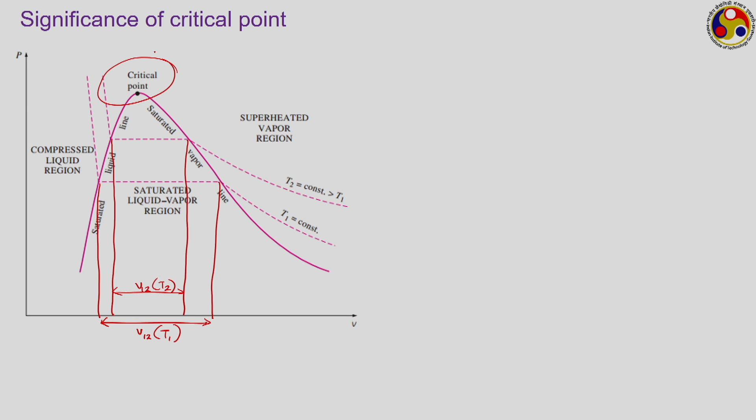So this is V1 to 2 for temperature T1, and this is V1 to 2 corresponding to temperature T2, which is definitely much smaller. As we keep moving to higher pressure or higher temperature, this value keeps reducing continuously until we reach the critical point, where the saturated liquid state and saturated vapor state merge with each other, and there is no distinction between liquid and vapor at this juncture.

So, the critical point is a property for any fluid, and therefore any substance has a fixed value of pressure and temperature at the critical point. But apart from being the point which removes the distinction between liquid and vapor phase, there is some further importance or significance of the critical point as well.

Now, let us follow any particular temperature line. Let us follow the temperature line shown as T1. So, let us start with a superheated vapor state, say somewhere here. We are starting from this state point, and at constant temperature we are increasing the pressure of the system.

So, what will happen? As the pressure increases, we shall be moving along this line, that is the volume keeps on decreasing, and after continuous increase in pressure, at some point we shall be reaching the saturation pressure, which is this much. So this is your P sat corresponding to this temperature T1. At this particular point, any further effort to increase the pressure will not cause any change in pressure.

Rather that will cause a change in phase, that is the superheated vapor now starts to condense and gets converted to the liquid phase, and with continuous effort to increase the pressure we will keep on condensing the vapor till it reaches the corresponding saturated liquid state, and from that point onwards again the pressure can keep on increasing. So, that we all know now.

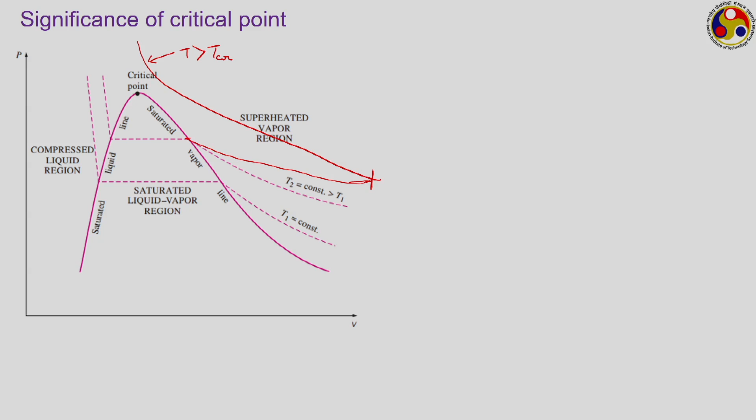So when dealing with a temperature higher than the critical temperature, the vapor phase becomes non-condensable during any constant temperature process. Of course, we could cause a change in temperature, moving through several different temperature levels, and may reach a saturation point, but that's not the focus here. Here we are looking to move along a constant temperature line, with temperature higher than critical. We can see that we can never condense a superheated vapor by operating at that level.

Similarly, if we operate at a pressure higher than the critical pressure, let's pick a line like this, where the pressure is definitely higher than critical pressure. We start from a point here, and keeping the pressure constant, reduce the temperature of the vapor. As the vapor temperature reduces, the specific volume reduces, so we move along this line. Remember, the pressure is constant. We move along the horizontal line towards smaller volume, and again pressure remains constant, temperature decreases, specific volume decreases correspondingly, but there's no change in phase because it never comes in contact with the vapor dome.

So when operating at a condition above the critical point, we can't convert vapor to liquid, or initiate any condensation process by any simple way. For any temperature level above critical temperature, we can't do it by simple compression. Similarly, for any pressure level beyond the critical point, we can't do it by simply changing temperature at constant pressure. We have to change both pressure and temperature simultaneously. That's why substances at a state above the critical point are called gas or non-condensable gases, because at constant temperature we can't condense these gases simply by reducing or increasing pressure.

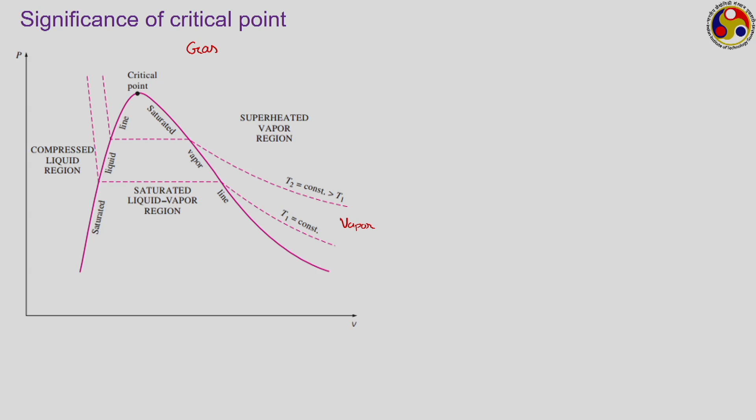Whereas when dealing with a substance below its critical point, we call it a vapor. Like a substance or superheated vapor at temperature T1 or T2, it should be treated as vapor, because maintaining that constant temperature, simply by compressing, we can convert them to liquid. But that we can't do for any temperature level above the critical point.

For example, if we pick up water, for water the critical pressure is 22.06 megapascal and critical temperature is 373.95 degree Celsius, or roughly 374 degree Celsius.

If we talk about standard atmospheric condition, something like 0.1 megapascal and 30 degree Celsius, here both pressure and temperature for water are below the critical point values. Suppose the atmospheric temperature is 30 degree Celsius, this may be T1. Then maintaining that constant temperature, simply by increasing its pressure, you can make water vapor condense to liquid. Similarly, if you're at atmospheric pressure level, 0.1 megapascal or 1 bar, at this constant pressure, you may be operating somewhere along this line. At this constant pressure, if you just reduce the temperature, you can make this vapor condense. Therefore, water under normal atmospheric condition should be treated as vapor.

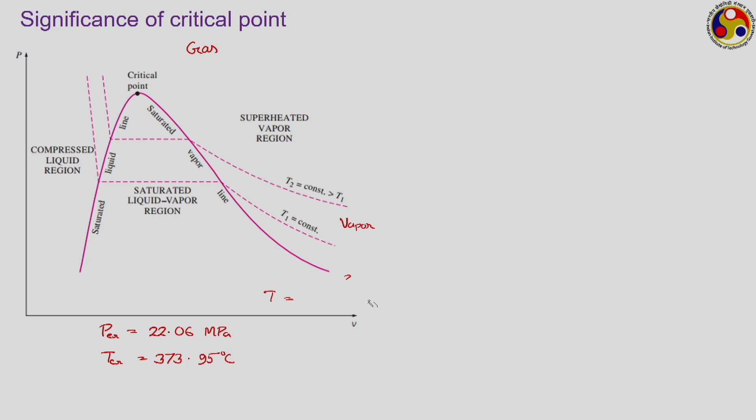However, if we are dealing with water in some industrial application, where the water vapor temperature is something like 1000 degree Celsius, quite commonly possible in IC engine or gas turbine applications, here we are having a gas mixture whose temperature is 1000 degree Celsius.

The water vapor present at this temperature is at a temperature much higher than the critical temperature, and therefore, by simply pressurizing this vapor we can't convert it to a liquid. So for this particular condition, water should not be called a vapor, it should be called gas, because it is at a condition much beyond its critical point. Let us talk about any other substance.

Let us say our second substance is helium. For helium, the critical point values are 0.23 megapascal, which is still higher than atmospheric pressure, but its critical temperature is minus 267.85 degree Celsius. This is extremely small, that is, under normal atmospheric conditions, even in most cryogenic applications, the temperature of helium is well above its critical temperature.

So we can't convert helium to the liquid state by simply compressing it. We first have to reduce the temperature below this value, and then only by simple compression can we convert helium to liquid state. Therefore, helium under normal atmospheric condition should be called a gas and not vapor. The same is true for all common gases like oxygen, hydrogen, nitrogen.

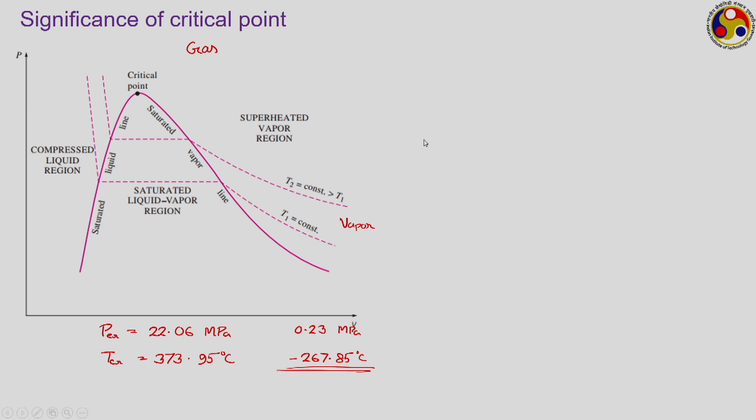And not only this, it has also been found that the second derivative of the same thing, for T equal to T critical, is also equal to 0. These two are very important mathematical criteria which we shall be using in the next lecture while talking about the van der Waals equation of state. So this is the discussion we need to have related to the critical point.

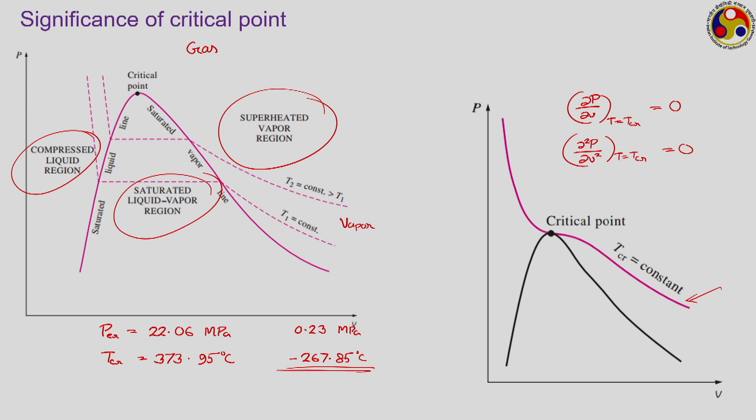What we are going to discuss now is the way to calculate properties in the compressed liquid region, saturated liquid-vapor region, and superheated vapor region, as long as we restrict ourselves to the critical point values. Saturated liquid and vapor states, as mentioned, refer to the two extreme points of the mixture region, that is, for a given temperature or pressure, the point where the liquid is just about to vaporize is referred to as the saturated liquid state, and the point where vapor is about to condense is referred to as the saturated vapor state.

So these are the two lines corresponding to this. Now, one important convention in thermodynamics: the saturated liquid state is generally represented by subscript small f, or any property associated with the saturated liquid state is given the subscript small f, whereas any property associated with the saturated vapor state is given the subscript small g. That is, when talking about something like specific volume at the saturated liquid state...

Like in the experiment of heating water at constant pressure that we talked about, saturated liquid state refers to state number 2 there, that is, under atmospheric condition at 100 degree Celsius it reaches the saturated liquid state. So any property here, like specific volume at this state, should be called Vf, like enthalpy at this state should be called H small f, and so on.

Whereas, if we talk about state 4, which is the saturated vapor state where 100% of the fluid has been converted to vapor, then here we use the subscript g. So the specific volume of this vapor state should be called Vg, enthalpy should be called Hg, internal energy should be called Ug, just like this.

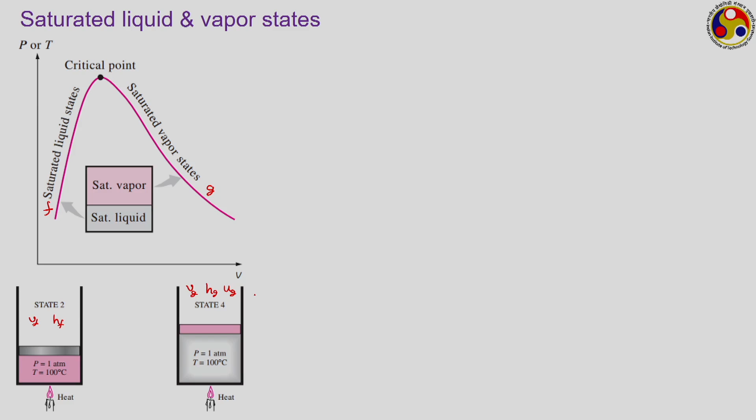So, if we are talking about an intensive property Y in general, then Yf refers to the saturated liquid and Yg refers to the saturated vapor. Saturated liquid state corresponds to a quality value of 0, where 100% of the mixture is liquid, whereas saturated vapor state, the G refers to x equal to 1, where 100% of the mixture is vapor.

When we are talking about the change in a certain property from the saturated liquid state to the saturated vapor state, like Yg minus Yf, the change in the value of this property Y from saturated liquid state to saturated vapor state is quite often denoted using subscript fg, like Y12 that we have written earlier. Instead of 1, 2 we shall now be using F and G.

So, the change in specific volume, say we have started with this particular state where we have 100% liquid under saturated condition and converted that on heating to 100% vapor under saturated condition. Then we have moved from state F to state G, and the corresponding change in specific volume should be denoted as Vfg, which is nothing but the difference between Vg and Vf. The corresponding change in the enthalpy of the mixture should be Hfg, which is Hg minus Hf.

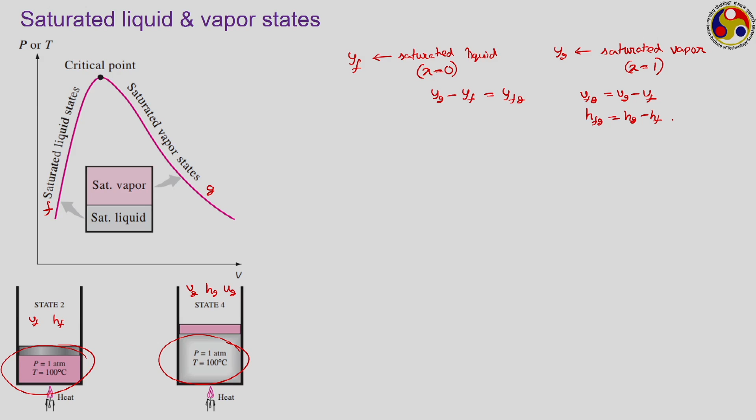This is often called the enthalpy of vaporization, or more commonly the latent heat of vaporization. The change in enthalpy from saturated liquid state to saturated vapor state is called the latent heat of vaporization.

The property values, or at least the pressure and temperature and any other F and G values for any other property, are commonly given in standard tables. The tables I am going to show are adopted from the book by Cengel and Boles, so I am thankful to that book for providing this data. Because of copyright issues I can't provide the table directly, but you can refer to that book; you can take it from these slides, though these tables are not complete. For detailed data you can refer to any standard textbook.

For the saturated water temperature table, we have temperature given in the left-hand column and saturation pressure corresponding to that temperature in the second column. If we take, say, 30 degrees Celsius, you can directly see from the table that the saturation pressure corresponding to 30 degrees Celsius is 4.2469 kilopascal, and the corresponding Vf and Vg values are also given in meter cube per kg.

Similarly, tables are also available corresponding to pressure, where pressure is the independent variable in the first column. If you pick up, say, 10 kilopascal, you can clearly see the saturation temperature corresponding to 10 kilopascal is 45.81. That is, if you want to convert a certain quantity of liquid maintained at 10 kilopascal to vapor, you first have to heat it to 45.81 degrees, and then it converts to vapor phase. You do not have to go to 100 degrees Celsius, because that is the saturation temperature corresponding to normal atmospheric pressure, which is 101 kilopascal.

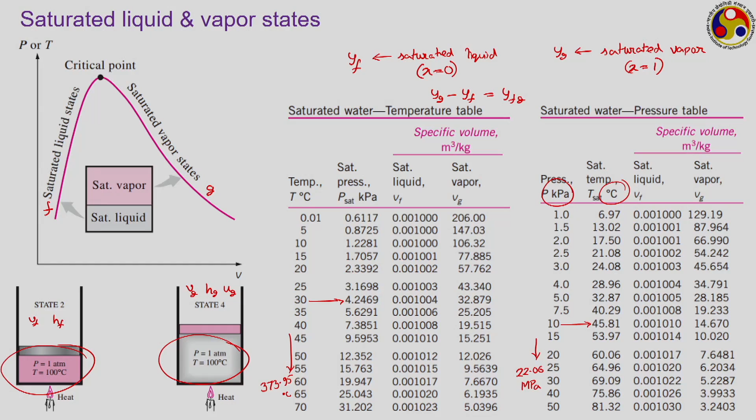Let us try to see the validity of this relation using this table for low temperature. We have to estimate the saturation pressure of water at 105 degree Celsius and 120 degree Celsius using the data available corresponding to 100 degree Celsius. The R for water is given, HFG corresponding to 100 degree Celsius and saturation pressure corresponding to 100 degree Celsius are also given. Let us do it first for 105 degree Celsius.

For 105 degree C, here you have T sat 1 corresponding to 100 degree Celsius for which all the data are known, which is basically 373.15 Kelvin. Remember that the data available in the table and also in the chart are in degree Celsius, and in the question here also in degree Celsius, but the temperatures in the Clausius-Clapeyron equation are in Kelvin, these are absolute temperatures. So we always have to do this conversion.

T sat 2, for which we want to do the calculation, is 105 degree Celsius, that is 378.15 Kelvin. Here your P sat 1 is given, R and HFG are also given. So let us apply the Clapeyron equation.

So log of P sat 2 divided by P sat 1 is 101.42 into 10 cube, remember the value is given in kilopascal, that is equal to R upon HFG. Here R and HFG both are in kilojoule per kg Kelvin or kilojoule per kg, so we can continue with them, or in their basic version we can write R as 0.4615 into 10 to the power 3 divided by HFG which is 2256.4 into 10 to the power 3, into 1 by T sat 1, which is 373.15, minus 1 by 378.15.

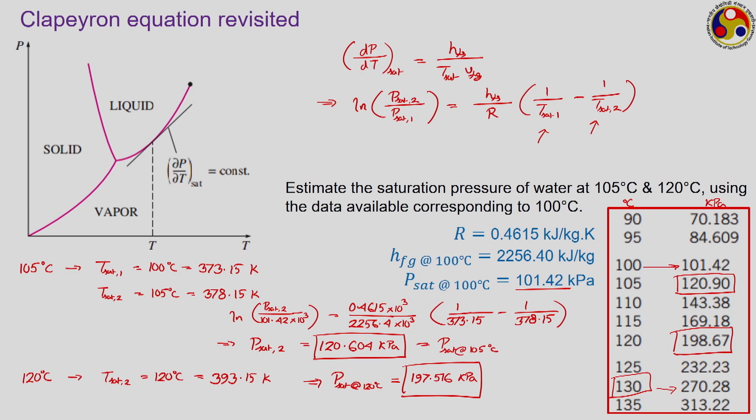So, this is about the saturated liquid and vapor state and saturation pressure temperature. Let us now move to the saturated liquid vapor mixture.

For a saturated liquid vapor mixture, we are actually dealing with a non-homogeneous substance, truly speaking, but the definition of pure substance involves the term uniform or homogeneous. But you must have always seen when water boils in a container, you have liquid in certain portions of the volume, whereas vapor bubbles occupy certain other portions, leading to non-homogeneity.

However, in most thermodynamic analysis, we neglect this non-homogeneity, and instead of having liquid in some part and vapor in some other part, we assume the entire volume to be filled up with some hypothetical fluid whose properties are the average property of the entire mixture. We have properties Vf for the saturated liquid part, Vg for the saturated vapor part, and we assume the entire mixture to have a property V average. Now, how do we calculate this V average, or any general property Y average?

Let us assume we are dealing with a mixture of total mass M total, out of which we have Mf part occupied by liquid and Mg part occupied by the vapor phase.

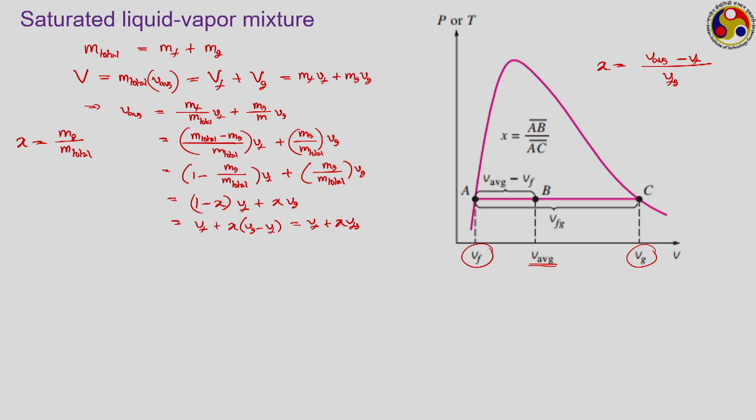the vapor, V average minus Vf. Similarly, the other portion, this total distance A to C, is actually Vfg. Now, if you see from this relation, if you rearrange it, we can always write x is equal to V average minus Vf by Vfg, and therefore x can be written as the ratio of these two line segments, AB and AC, and that is what we have here.

For any intermediate point during a mixture state, we have Vf at one end corresponding to x equal to 0, and Vg at the other end corresponding to x equal to 1. Instead of specific volume, for any property y of the mixture, at a known pressure or temperature (P sat or T sat), we can write it as (1 minus x) times Yf plus x times Yg, both evaluated at the same pressure or temperature. This y can be specific volume, specific internal energy, specific enthalpy, specific entropy, or any other property that can be represented by these mass ratios.

This way we can use the idea of mass fraction or quality for a saturated liquid-vapor mixture to calculate properties. We just need to know the F values and G values. Sometimes instead of writing it this way, we can combine them as Yf plus x times Yfg, which is the difference between G and F.

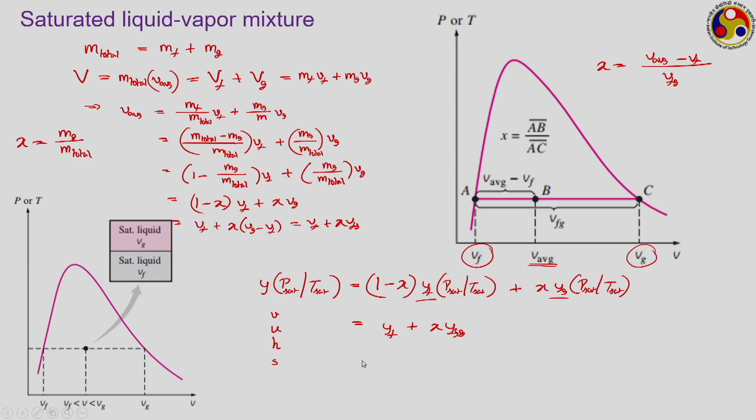This way, for any saturated mixture we can always calculate the properties using these tables. Earlier I showed only a glimpse of the table with temperature, pressure, and specific volume. Here is a more complete table where we have internal energy, enthalpy, and entropy, or specific internal energy, specific enthalpy, and specific entropy, all taken into consideration.

You can follow any horizontal line. This is a temperature table, so temperature is the independent variable. Let us say we talk about 50 degree Celsius. If we follow the horizontal line corresponding to 50 degree Celsius, this gives the saturation pressure corresponding to it, 12.352 kilopascal. These are the Vf and Vg values for this.

These are the specific internal energies, so you have Uf, Ufg and Ug. Truly speaking, Ufg is not required because Ufg is nothing but Ug minus Uf. But similar to this table, several tables also represent this fg value separately.

So these are the Hf, Hfg and Hg, and these are Sf, Sfg and Sg. For each of these cases, if you are interested, you can calculate this. You will always find that the fg value is just the difference between g and f, and therefore g and f alone are sufficient. Of course, no one can remember these values, so we have to make use of these tables for calculating any mixture property.

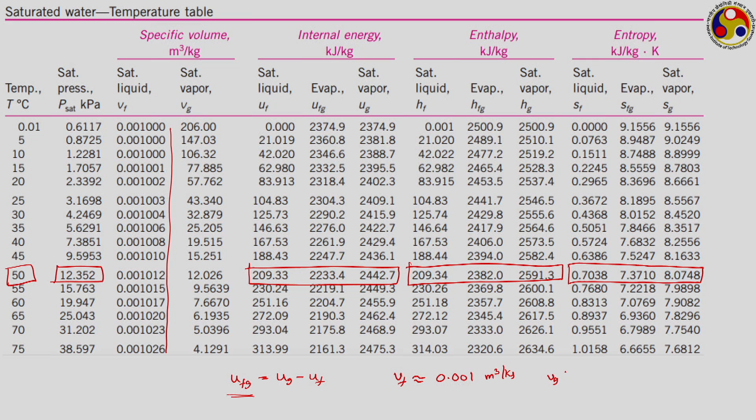Another interesting thing to note here is that this table is for water. For water, the value of Vf in all these cases is extremely small. You can almost blindly, at least up to 75 degree Celsius, and truly speaking even well beyond that, say this Vf is about 0.001 meter cube per kg, and Vg is much greater than Vf over a large range of temperature and pressure.

This is the corresponding pressure table. Again, this table is incomplete; this pressure level can go up to the critical pressure. You can see here again, for any pressure level, the Vg value is significantly larger than Vf. So unless we are dealing with a very high pressure situation, we generally can neglect the volume of Vf.

These Hfg values are the latent heat of vaporization, whereas this is the entropy associated with the vaporization process, representing the transition between f and g.

Let us now try to solve a couple of numerical exercises quickly to understand the use of these tables. The table that I have shown here, I am making use of the same table. It is just copied from the book of Cengel and Boles, and the data values that I have here are the ones I am going to use to solve this problem.

Look at the first one. Here we are talking about a rigid tank containing 10 kg of water at 90 degrees Celsius. If 8 kg of water is in liquid form and the rest is in vapor form, determine the pressure inside the tank and the volume of the tank.

Here we have a rigid tank containing a mixture of liquid and vapor phase of water. Whenever we talk about a mixture of liquid and vapor phase, even if equilibrium is not specifically mentioned in the problem, we can assume it to be in equilibrium. Whenever you have a mixture, it has to be under saturation condition, so actually we are dealing with a saturated mixture. It is very important to understand the nature of the state at the beginning itself.

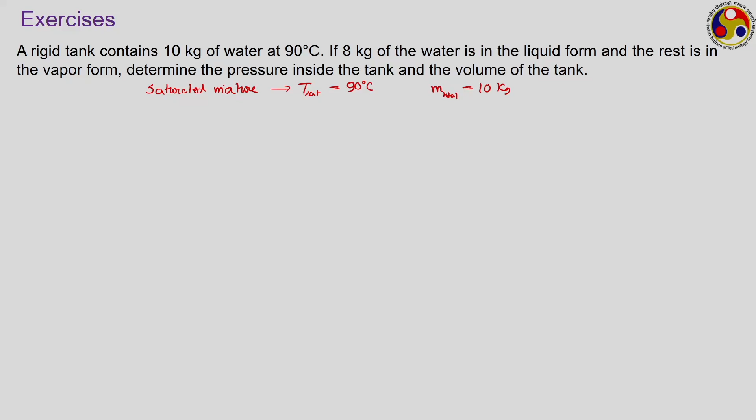For a saturated mixture, we need temperature or pressure, either one. Temperature is given to be 90 degrees Celsius. Total mass, your M total is 10 kg, out of which the liquid phase is 8 kg. So your Mf is 8 kg, that means Mg is 10 minus 8, that is 2 kg. So how much will be your X? Your X will be 2 upon 10, that is 0.2.

Now you know the saturation temperature and you know the quality, therefore the state is completely defined because you know two independent intensive properties. Remember, for a saturated mixture you need to know either temperature or pressure, and the quality value, and using this you can easily solve this problem.

But before doing that, I would like to go back to the previous table to mention something. If instead of quality you are given some other property value, suppose you are dealing with a system where the pressure is 20 kilopascal, and suppose the value of enthalpy is given. Now you have to understand what kind of state you are dealing with: compressed liquid, mixture, or superheated vapor. How can you do that?

You have to check the two values corresponding to 20 kilopascal, which are your Hf and your Hg. Just check these Hf and Hg values. Now, if your H is less than Hf, which state do you belong to? Your enthalpy of the fluid is less than the saturated liquid enthalpy, so you are in the compressed liquid zone. When your H is greater than Hg, where are you? You are in the superheated vapor zone.

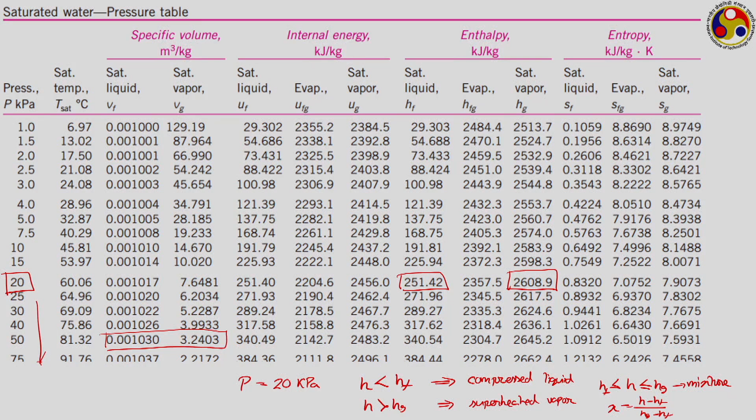For compressed liquid and superheated vapor, how to get the properties we shall soon discuss. Only when your H is restricted within Hf and Hg are you in the mixture zone, and you can calculate the quality of the mixture as H minus Hf divided by Hg minus Hf, thereby identifying the quality value and making way to calculate all other properties. Therefore, even when the quality is not known, but some other property value is known, you can easily calculate the state of the fluid.

Now, coming back to this particular problem, we now know the state, so how to solve this? You have to identify the pressure inside the tank. What will be your pressure? Pressure has to be the saturation pressure corresponding to 90 degrees Celsius. So you check your table, and the corresponding pressure comes to be 70.183 kilopascal. I am noting it from the table only, the table that I have shown.

From there I am noting these values, and then you have to calculate the volume inside the tank. The total volume of the tank should be equal to the volume occupied by the liquid phase plus the volume occupied by the vapor phase. If we take m out, you can easily write this as 1 minus x into Vf plus x into Vg, and Vf and Vg correspond to the saturation temperature, which is 90 degrees Celsius. From the table you note the value of Vf and Vg corresponding to 90 degrees Celsius, and then evaluate this value. This final volume comes to be 4.73 meter cube. Please do this calculation and check whether you get this number.

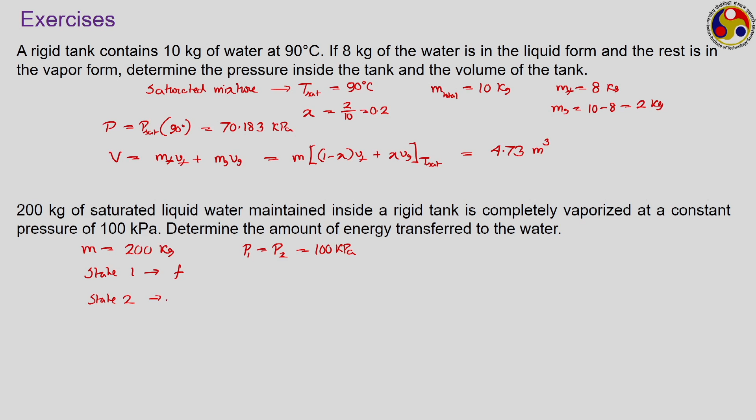So, the final state is that of a vapor, which is G. No mention about superheating, so we shall be taking the saturated vapor state. You have to determine the amount of energy transferred to the water during the process. So, how can you calculate that?

We are talking about some energy transfer, and whenever we are talking about energy transfer, we have to make use of the first law of thermodynamics, which gives you the energy balance. Now, what kind of system are we talking about? We are talking about a rigid tank, that means no boundary work, no movement of the boundary, and we are talking about a fixed mass. Mass is not changing, so we are talking about a closed system.

If we write the first law of thermodynamics for a closed system with rigid wall, then we can write del Q minus del W equals dE, that is du plus d of kinetic energy plus d of potential energy. Now, no mention is given about changes in kinetic and potential energy of the system, so we are assuming it to be a stationary system. So, these two cancel out, and we have a rigid tank, no moving boundary work, so del W cancels out.

That means, during the process, the total heat transfer from 1 to 2 will be equal to U2 minus U1, the changes in the total internal energy of the substance, that is equal to m into small u2 minus small u1. Now, what is your state 2? State 2 is ug, or g only, and state 1 is f, both corresponding to the same pressure of 100 kPa. So, you can use the table corresponding to 100 kilopascal to get the uf and ug values.

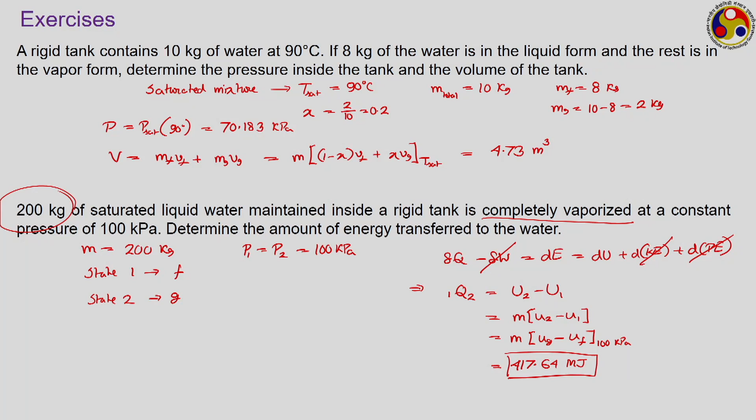Now, let us quickly talk about the superheated vapor. As we have seen, the superheated vapor stage refers to the state beyond the saturated vapor condition. So, superheated vapor state can be identified when the pressure is less than the saturation pressure for a given temperature, or temperature is

greater than the saturation temperature corresponding to a given pressure. And instead of pressure and temperature, some other property is given, say property y, specific value of the property. Then if the value of this y is greater than yg corresponding to either its pressure or temperature, whichever is given, then it is a superheated vapor that we are talking about.

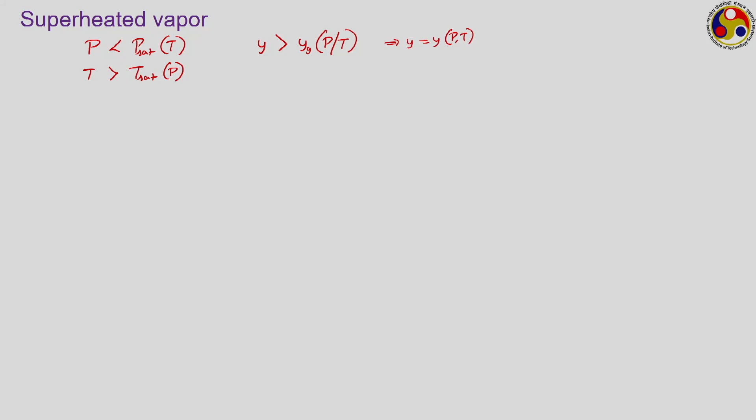Yes, for superheated vapor, here any property y is a function of both pressure and temperature. We do not have any quality kind of thing, and pressure and temperature are independent of each other. Therefore, to have any kind of table you need to have separate tables for each pressure and temperature.

So, suppose you are given a condition where the pressure is 1.2 megapascal and the temperature is 400 degrees Celsius. Then you have to identify the property values. How to do that? First, corresponding to this 1.2 megapascal, you check what is the saturation temperature. Now, corresponding to 1.2 megapascal, saturation temperature is 187.96 degrees Celsius. So, temperature is greater than the saturation temperature corresponding to pressure, so it is definitely in the superheated condition.

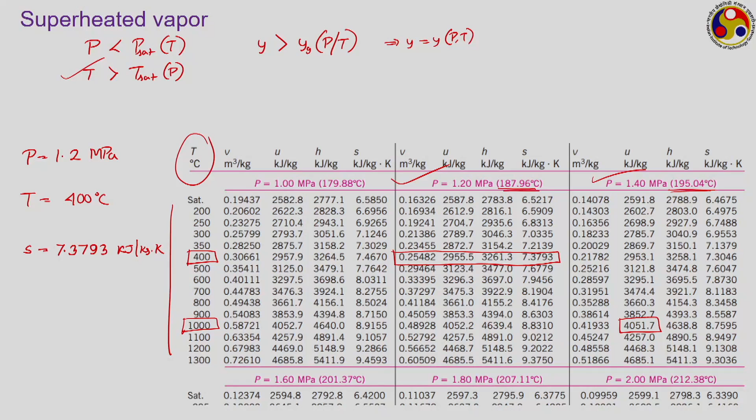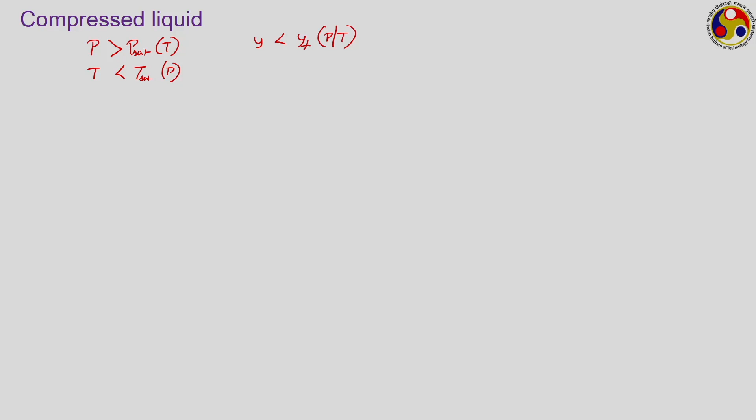So this way we can take the values for superheated vapor. Similar tables are also available for compressed liquid. Compressed liquid means the general situation where the pressure is greater than saturation pressure corresponding to its temperature, or temperature is less than the saturation temperature corresponding to its pressure, or if any general property Y is given, Y has to be less than YF corresponding to the pressure or temperature whichever is given. So from there you can easily identify. Similar to the superheated vapor, here also Y is a function of pressure and temperature, and so we need similar tables just like the one shown here.

But truly speaking, for compressed liquid often we do not have to use the table, because it has been identified that compressed liquid is very much incompressible, or nearly incompressible. So the dependence of these properties on pressure is quite weak - they are solely, or mostly, dependent on temperature. So quite often, instead of taking the value from the table, we assume Y to be equal to YF corresponding to its temperature, not pressure. We just neglect the pressure dependence - whatever temperature value you have, we just take the corresponding YF for that.

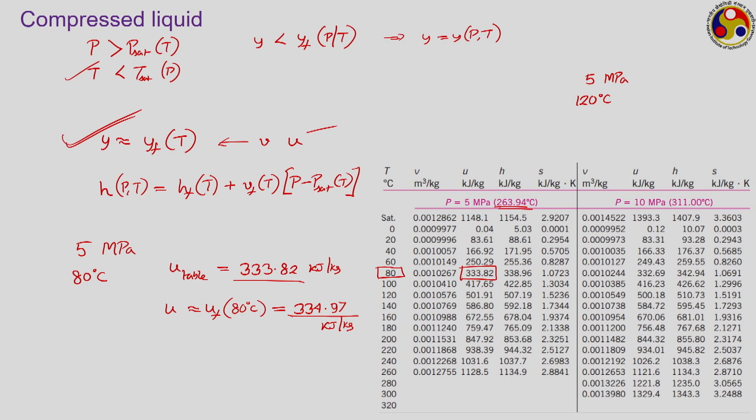I would like to wrap up this by solving a couple of numerical problems quickly. I have a problem here, please read it quickly.

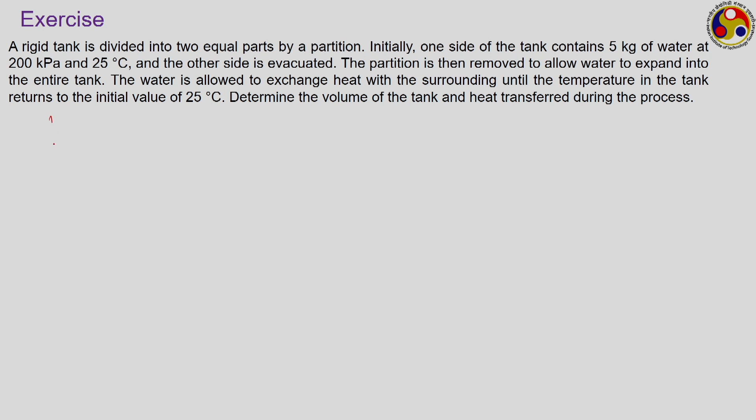Here we are talking about a rigid tank which is divided into two equal parts by a partition. So, we have a tank which is divided into two equal parts, this is your part A and this is your part B, which are having equal volume.

Initially one side of the tank contains 5 kg of water at 200 kilopascal and 25 degree Celsius. So, initially total volume is V by 2, where V is the volume of the tank. Here mass is 5 kg or M1, then we have P1 equal to 200 kilopascal and T1 equal to 25 degree Celsius.

Second, other side is evacuated. Now, the partition has been removed to allow water to expand into the entire tank. The water is allowed to exchange heat with the surrounding until the temperature in the tank returns to the initial value of 25 degree Celsius.

So, in the final state your volume is the total volume, which is nothing but twice of V1, because the gas is now occupying the entire volume. What will be the mass? This is a rigid tank, no mass transfer. So, M2 equal to M1 means we are talking about a closed system in terms of the gas.

And the final temperature T2, that is the same, which is 25 degree Celsius, but pressure may not be same. So, you have to calculate the volume of the tank and the heat transfer associated with this process to get the final temperature back to 25 degree Celsius. How to approach it?

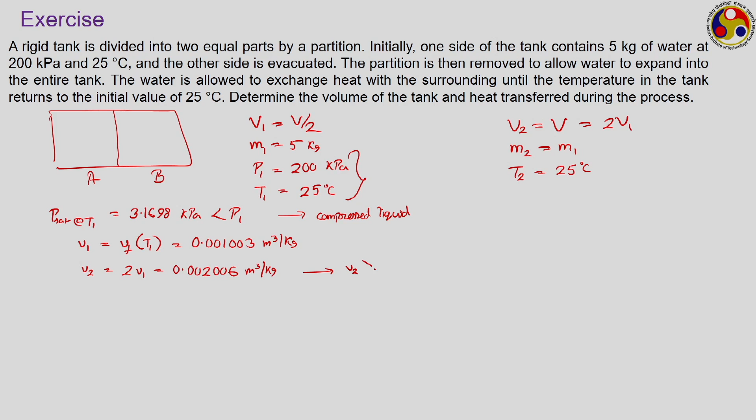Now, look at the second state, temperature is 25 degree Celsius and now you know the specific volume. From the specific volume and temperature data, we have to identify the state. This specific volume we have to now compare with the Vf and Vg corresponding to 25 degree Celsius. Now, this V2 here is greater than Vf corresponding to this T2. However, this V2 is less than Vg corresponding to T2. That means we are dealing with a saturated mixture.

So, corresponding to this we can calculate the quality. Your quality X2 will be equal to V2 minus Vf corresponding to T2, divided by Vg minus Vf both corresponding to T2. You can do the calculation. Here x is coming to be extremely small, 2.314 into 10 to the power minus 5. So, you know all the results, or you know the quality of this.

Now, you have to calculate first the volume of the tank. How much will be the volume of the tank? You can easily calculate the volume of the tank to be equal to m into small v2. Small v2 is known, so your volume of the tank, actually I have not calculated this number, so please use your calculator, mass is given to be 5 kg, V2 is there, you can get the volume of the tank. And secondly, to calculate the heat transfer, you have to go to the first law of thermodynamics.

So, we are using del Q minus del W is equal to du. I am directly writing du, assuming it to be a stationary system. It is a rigid tank, no moving boundary work. So, Q12 is equal to m into U2 minus U1, that is m into how much will be your U2?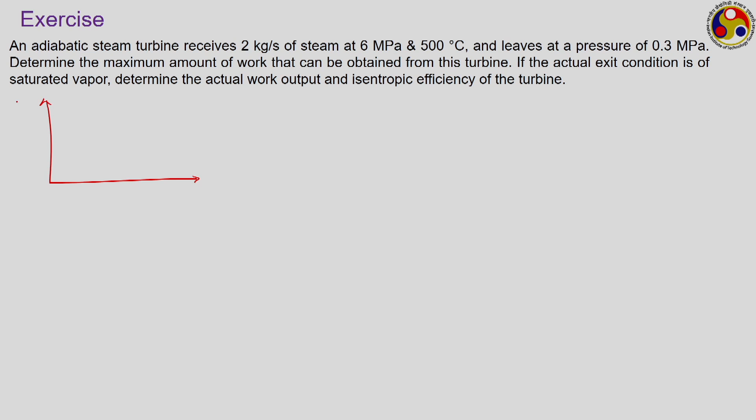Let me draw it properly. Here the initial state, mass flow rate is given as 2 kg per second, P1 is 6 megapascal, T1 is 500 degrees Celsius. Now, you can check the value of this T1, this T1 is much greater than Tsat corresponding to this P1. So we are talking about a superheated condition. So on this TS diagram, if we plot the constant pressure line, let us say plot the 6 megapascal line, then your initial state may be somewhere here, state 1.

And we are talking about an isentropic process during which the pressure drops to 0.3 megapascal. So we draw the second pressure line, this is your P1 line, this is your P2 line, where P2 is 0.3 megapascal. So your ideal process will be somewhat like this, and the actual process is that it is coming out as saturated vapor at a condition like this. So 2 and 2 prime: 2 is the ideal one, 2 prime is the actual one. So how to approach this?

P1 and T1 are given, so from this you can easily calculate whatever is required. So you can calculate S1, H1, etc. Now it is an isentropic process being followed in the turbine. If it is an isentropic process, then S2 should be equal to S1. If you use the values properly - here I do not have the numbers, please check the table - you will find that this S2 comes out greater than SF corresponding to your P2, but less than Sg corresponding to your P2, indicating that the final state 2 is a saturated mixture.

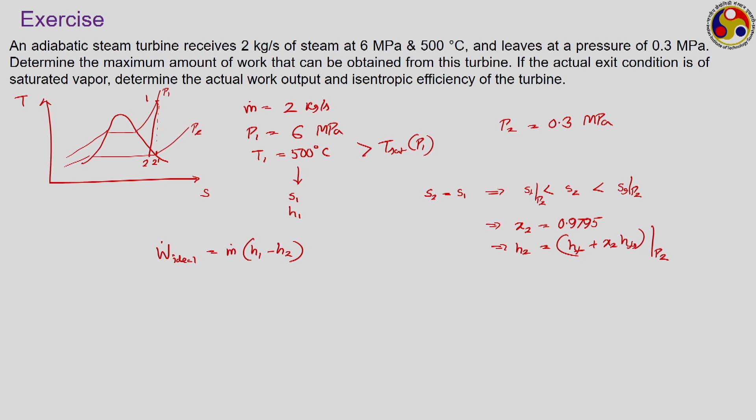So correspondingly you can calculate the x2 value, it will be coming something around 0.9795. So this is your x2 value. From x2 you can now calculate your h2, which will be equal to hf plus x2 hfg, both hf and hfg corresponding to your P2. So the ideal power output from this will be equal to m dot into h1 minus h2. But the actual exit state, because of frictional losses, because of the irreversibilities, is that of saturated vapor. So your H2 prime is actually Hg corresponding to P2, which you can get again from the table. So your W dot actual is m dot into H1 minus H2 prime.

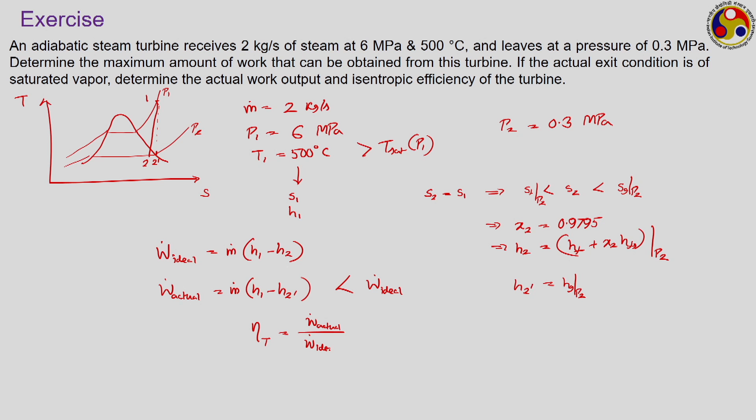If you do the calculation correctly, if you are able to take the data properly, you will find this will be coming less than the ideal one. And the isentropic efficiency for this turbine will be the ratio of these two, that is W dot actual by W dot ideal. So this way we can make use of the superheated vapor table to use the concept of entropy.

In the next lecture, I shall be trying to solve one problem involving exergy, where again we shall be making better use of all these tables. Till then, please go through the lecture, go to the books, try to see how to use those tables. Hopefully you will be able to use those tables for solving any such kind of problems, and we shall be doing several such exercises in the future modules as well. So this is where I would like to stop today.

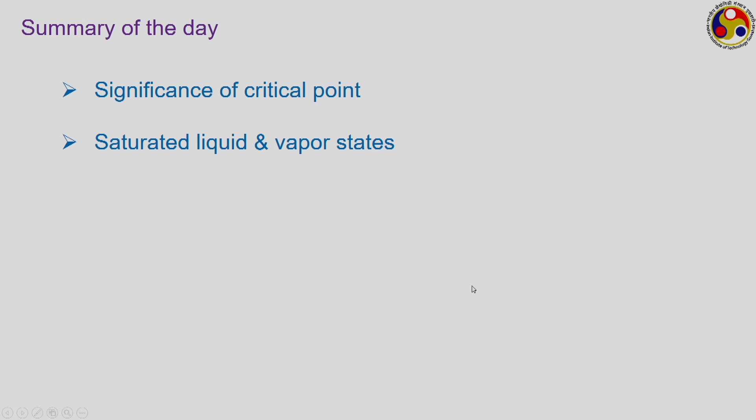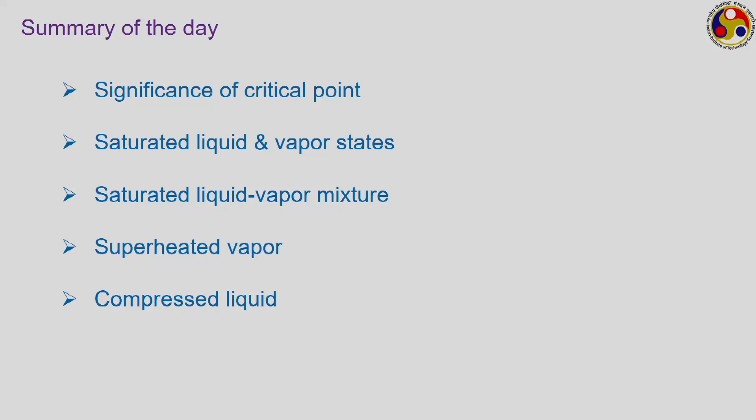Today we have briefly discussed the significance of critical point. Then we have talked about the saturated liquid and vapor state, how to use the property tables to calculate properties of saturated liquid vapor mixture, superheated vapor and compressed liquid, and also we have solved a few problems involving this. So I hope you have enjoyed this lecture.